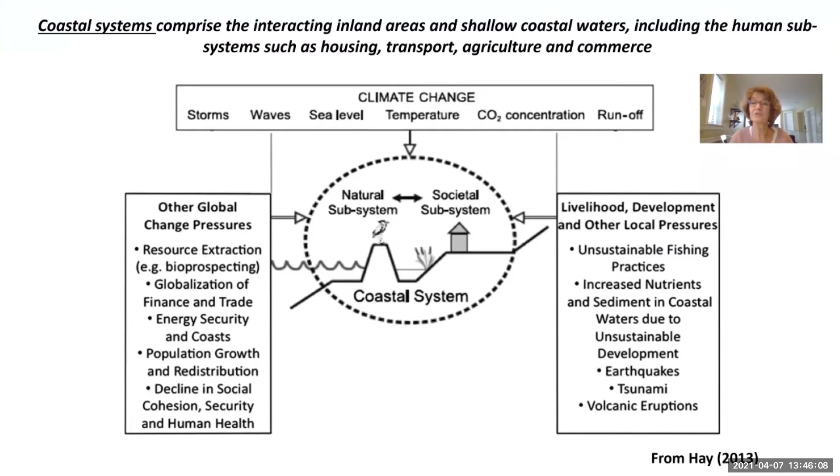These coastal systems are exposed to the impacts of climate change through storms, waves, sea level rise, elevated temperatures, elevated carbon dioxide concentration, and runoff of pollution to nearshore waters. So coastal systems are exposed to global pressures, climate pressures, and local livelihood and development pressures.

All small islands are interested in risk. All small island developing states in the Caribbean depend upon direct foreign investment, and thus they want their tourism development to have a manageable risk.

Risk is the intersection of natural hazards, exposure, and coastal vulnerability. Vulnerability is going to be what we're talking about today.

So what is coastal vulnerability? It's made up of two general categories of impacts: climate change impacts and anthropogenic impacts. We are going to look at the combination of these two on the vulnerability of the shoreline.

After hurricanes and extreme events, the damage to shorelines can be costly and irreversible, primarily with erosion, loss of shorelines, more land-based source of pollution, and destruction to natural coastal ecosystems.

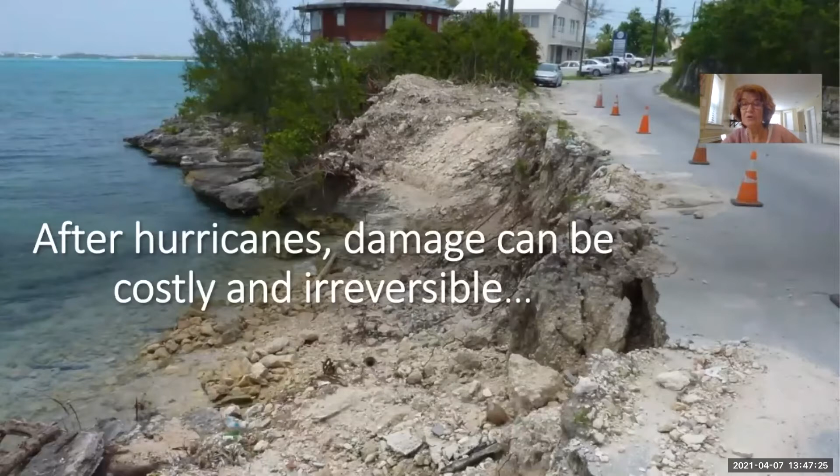Integrated coastal management, in theory, looks at managing development alongside managing coastal and marine resources. In integrated coastal zone development, you want to manage the different stakeholder groups and local communities intersecting with tourism coastal development and protection of natural resources that provide services and livelihoods for coastal communities.

The reality for coastal management in practice, particularly in the Bahamian archipelago, is the development of large coastal resorts. These coastal resorts fit a tourism model with lots of amenities, based on a business model with a certain large number of individuals that can come and go.

So how do we manage these development pressures against the climate change and global pressures on island ecosystems? We are going to look at a coastal vulnerability index that's been used in a number of different settings.

This coastal vulnerability index has four components: a component of coastal protection, coastal setbacks, the resilience of natural systems, plus the capacity of communities to respond and manage risks.

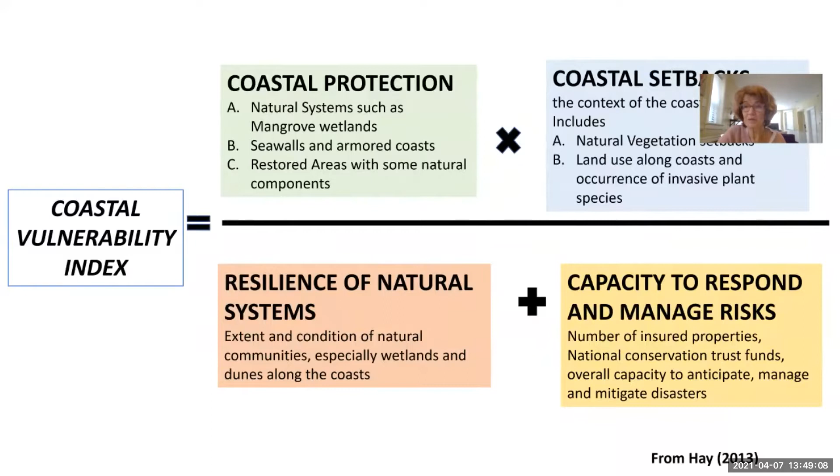We are going to modify this coastal vulnerability index and look at its application to small islands using solely ecological data, which is easy to collect on island-wide scales and can be used for island-wide vulnerability mapping and disaster response planning.

So we are going to look at the human-altered coastal areas, the lack of coastal setbacks in areas, the resilience of natural systems that occur in the area, plus a community's response to manage and respond to these risks.

In this example, our capacity to respond and manage risk is assumed to be the same across the island, and this will be a fixed variable in our equation.

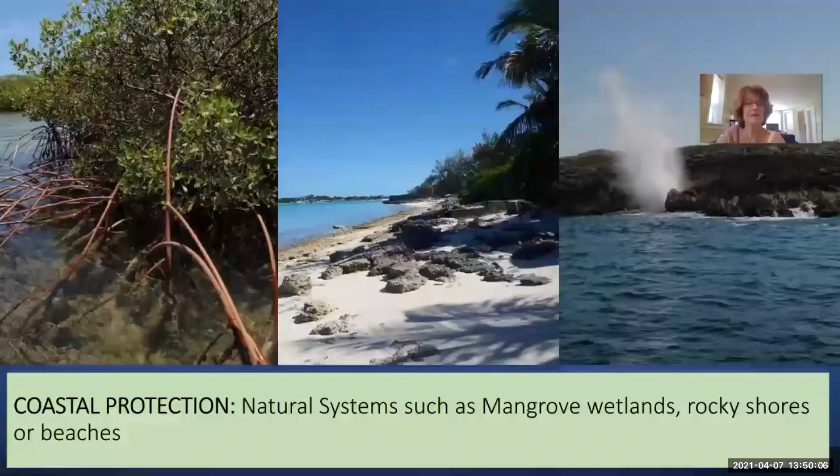When we talk about coastal protection, we're going to talk about the natural systems that occur across the insular Caribbean, such as mangrove wetlands, rocky shores, or beaches.

We're going to look at an island in the central Bahamas where we have developed an extensive spatial database on the distribution of natural communities and the vulnerability of this island to extreme events, such as hurricanes and flooding.

When we look at coastal setbacks, there have been throughout the Caribbean standard horizontal setbacks recommended by both the Caribbean Development Bank and the United Nations Environmental Program on how to protect property.

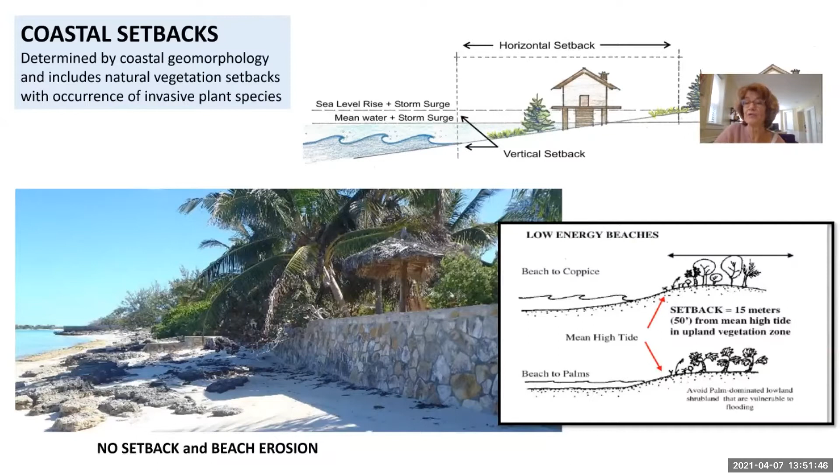Coastal setbacks are the horizontal distance back from the high tide line where you would place your building or property, allowing a natural vegetation buffer to protect that property. This horizontal setback varies in distance depending upon whether you have a high energy reef, a beach system, a low energy beach, a rocky shore, or mangroves.

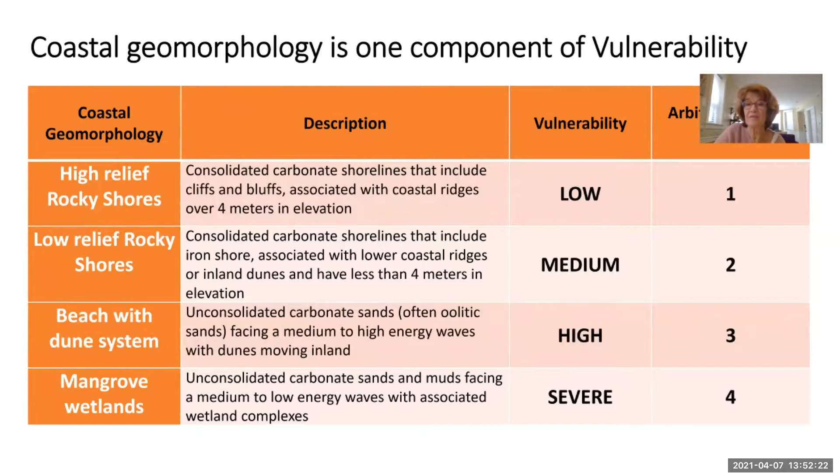Coastal geomorphology is one component of vulnerability. High cliffs and rocky shores are the least vulnerable. Low relief rocky shores are more vulnerable. Beaches with dunes are highly vulnerable, often because the dunes are removed in development and sand is removed in sand mining. And mangrove wetlands, because of their low-lying extent, are often severely vulnerable to flooding and climate change.

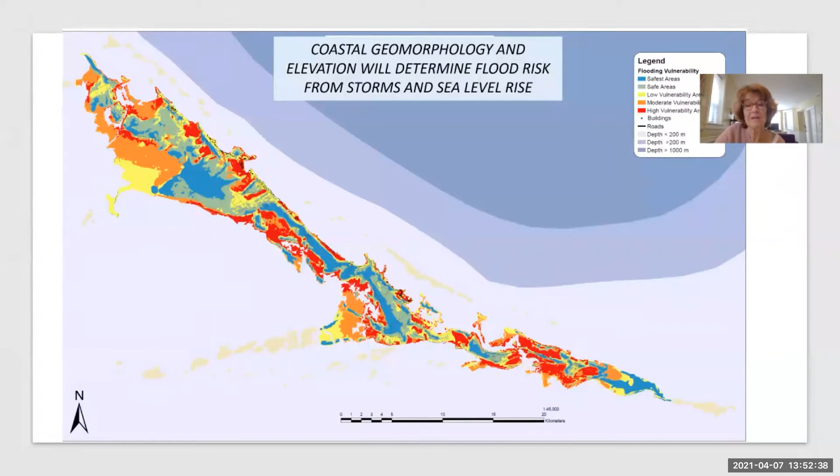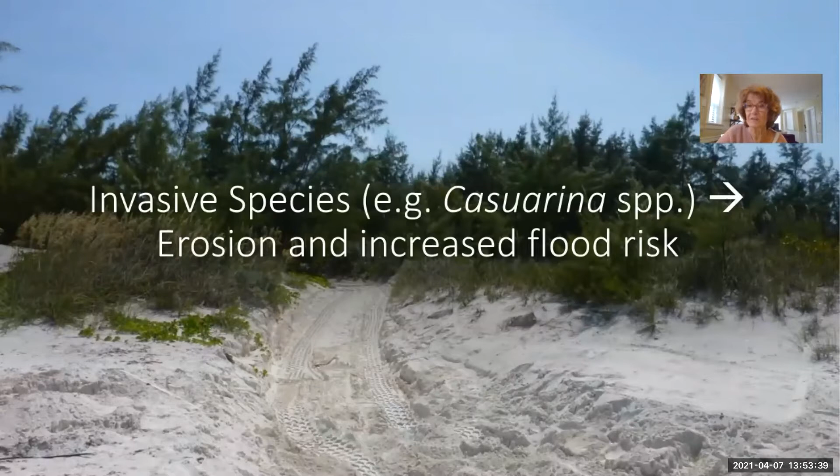Once we have the geomorphology, how do we really assess these coastal setbacks? We need to look at the extent of natural vegetation. When vegetation is removed, you have the increased risk of erosion and flooding in coastal areas, and particularly flooding to property. And when sand mining occurs and you have introduction of invasive species such as casuarina, the Australian pine, this also increases erosion and flood risk.

So resilience of natural system is the extent and condition of natural communities, especially wetlands and dunes along the coasts. These natural vegetation buffers are made up of drought-resistant, salt-resistant, slow-growing, hardy plants. The native plants have evolved over time to stabilize the shoreline, process pollutants, minimize erosion. So we see on the left, native vegetation on a rocky shore, the right, native vegetation along a sandy beach.

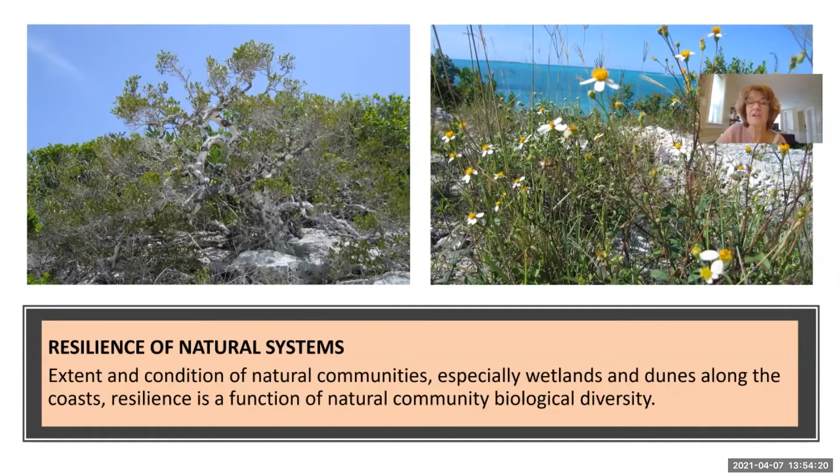The offshore communities can also protect shorelines from wave energy. So the diversity of invertebrates offshore can reflect the robustness of reef and hard bottom communities that can protect shorelines and add to this protection from the coastal geomorphology.

The capacity to respond to management risks is a function of the number of insured properties, national conservation trust funds, overall capacity to anticipate, manage, and mitigate disasters. This would be the subject of a whole other study. We're assuming that this would be more or less even across the entire island of Great Exuma, but having priority areas and more highly vulnerable areas highlighted would help focus this capacity to respond and manage risks across islands and archipelagos.

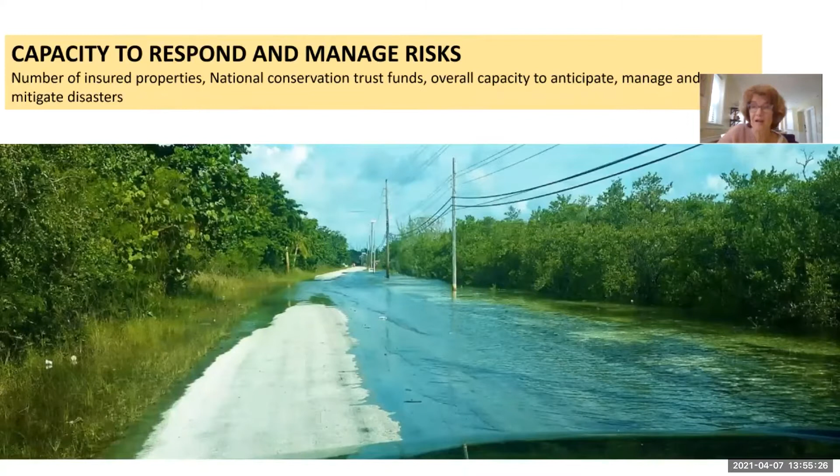So let's look at our coastal vulnerability index as we incorporated ecological components. We're going to look at human altered shoreline area times the lack of coastal setbacks over the resilience of natural systems plus this capacity to respond. This is modified from Hay 2013.

If we take the example of Georgetown, the largest settlement on the island, this is a highly developed, low relief rocky shore. So if we look at Georgetown coastal vulnerability, this is high, 1.325 for the island. Part of that is because the human altered shore, about 88% of the area has been altered. There's a large number of buildings, 127 buildings with moderate invasive species. And even though the coastal geomorphology is less risky, there is no coastal setback. The natural systems are fairly resilient, but this still gives us a vulnerable area.

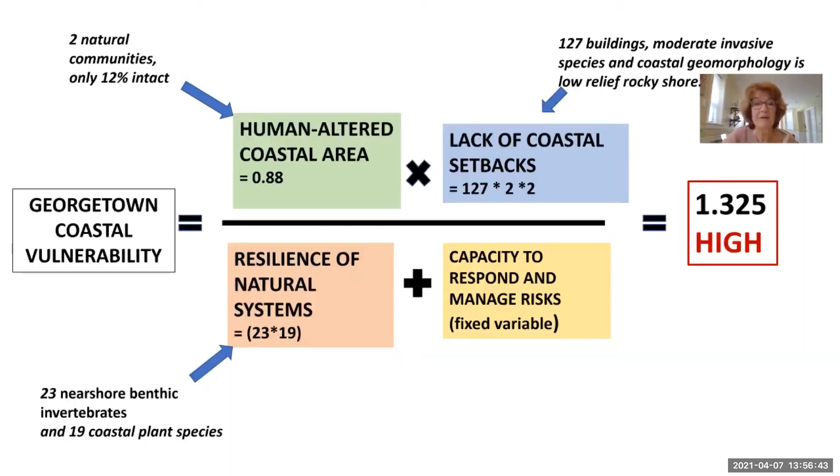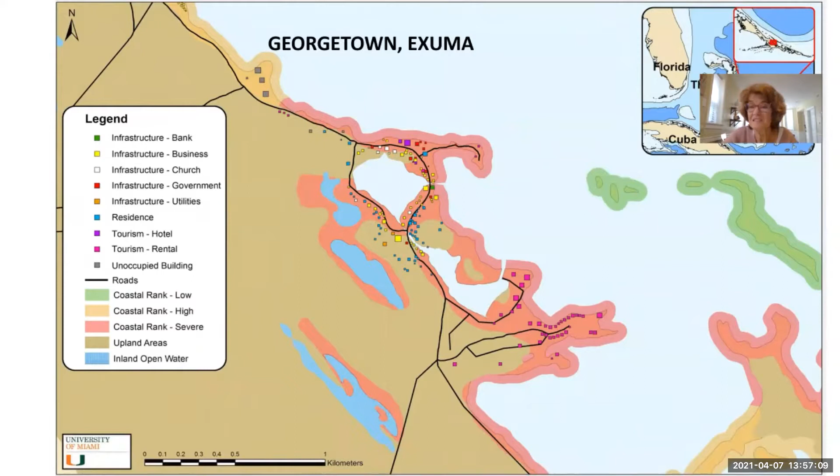If we look at our past analysis in coastal ranking and vulnerability to flooding, we can see that the Georgetown area in the center with a number of different buildings that include government buildings, infrastructure, tourism, and private residences is very vulnerable because of the density of development very, very close to the shoreline.

So coastal vulnerability is high if you have high alteration of natural communities, if you have natural communities that are highly fragmented, and if you have the lack of coastal setbacks and the resilience of natural systems is low.

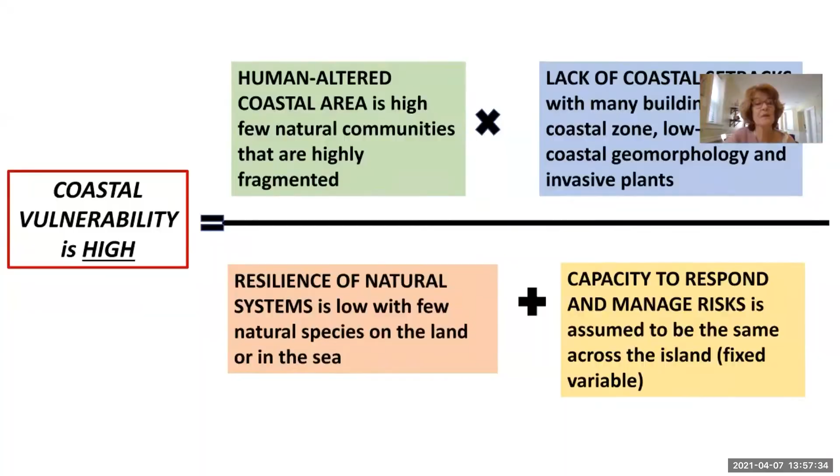We can look at the highest vulnerability on the island, which is actually a high energy beach with a lot of development right up to the water line. So the building envelope goes to the high tide line. There's mostly a loss of native species with dominant invasive species such as Australian pine. Part of this is historically a built-in risk because the main highway on the island is built along the original dune line. So moving of the roads and infrastructure could reduce vulnerability to some of these coastal properties.

Coastal vulnerability is low when you have high coastal protection with intact systems, you have coastal setbacks, you limit the number of buildings right along the coastal zone, and you depend upon the resilience of natural systems.

So in here in Bahama Sound, you have a very low coastal vulnerability index. This mainly is a function of much of the vegetation is left intact. There is one building, it's a low relief rocky shore, and you have a lot of vegetation, even though you have the same liability of the main highway very close to the shoreline.

So coastal vulnerability mapping can be a key component for coastal zone management and disaster response planning. This is the first step in helping people understand how they can use the natural environment to decrease their vulnerability to the future impacts of climate change.

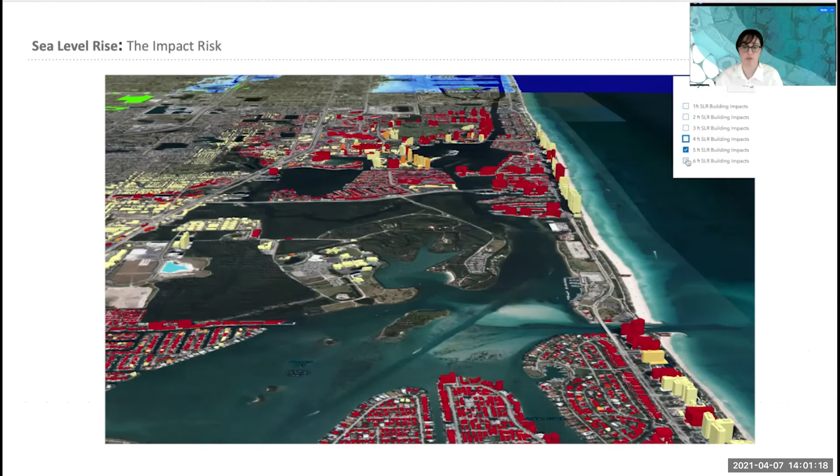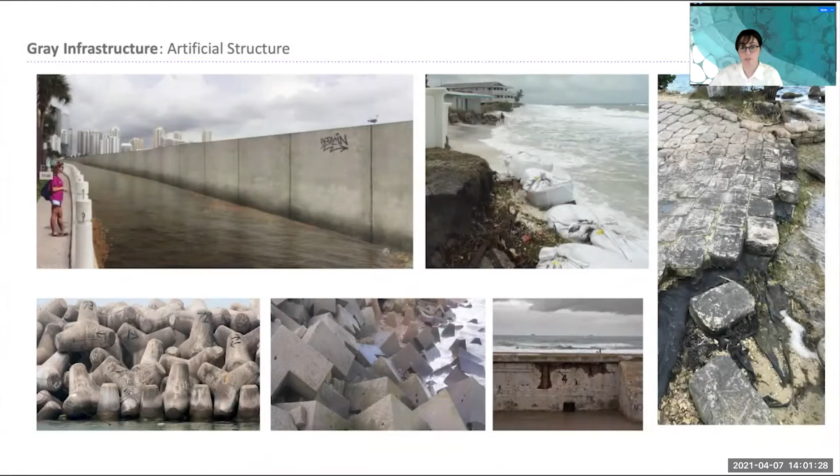Our coastal lines are in significant distress due to climate change. To protect the coastal area from climate change impact, a common and widely used technique is creating hard infrastructure. This often entails constructing a concrete barrier along the shoreline to provide a shield from wave attack, which can cause massive harm to the ecosystem by making coastal areas more vulnerable to storms and destroying the coastal habitat.

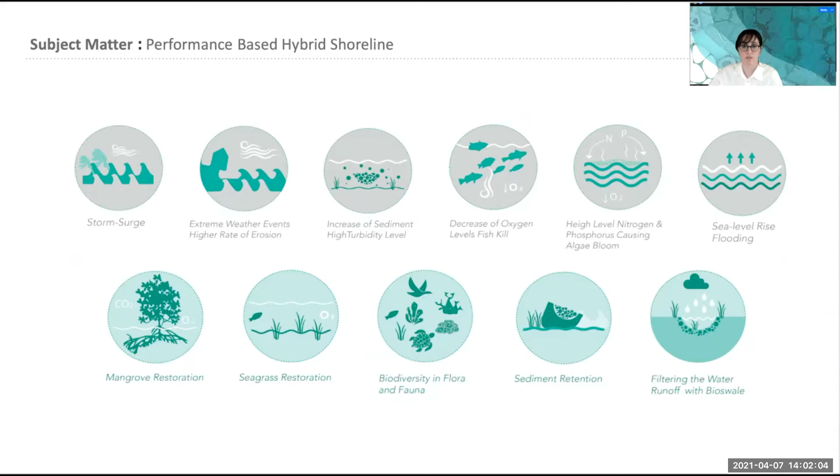The performance-based hybrid infrastructure project is a mitigation strategy for resisting sea level rise, deforestation of mangrove trees, restoring salt marsh seagrass, reducing high sedimentation rate and water turbidity level, and decelerating depopulation of marine biodiversity. This project is also designed to offer people a unique experience to come and engage and enjoy their local environments.

The project implements a sustainable strategy for creating a protective infrastructure framework that combines resilient shoreline with natural features. The aim is to create a performance-oriented landscape responsive to climatic conditions like water and wind forces generated over time.

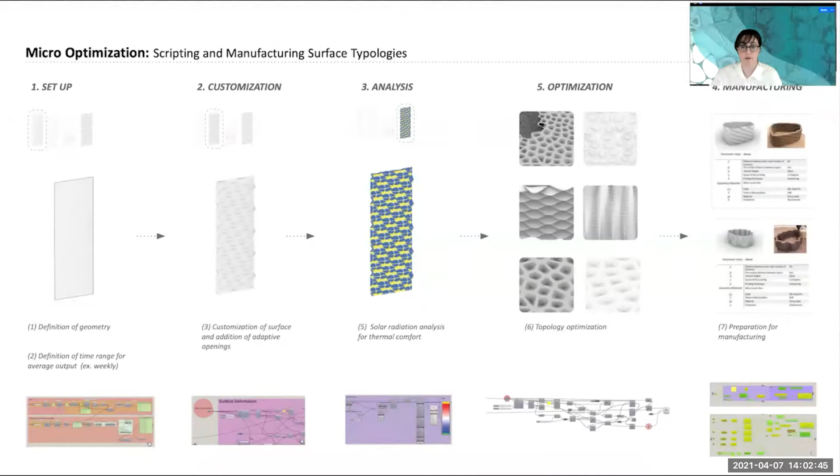Performance-oriented architecture attempts to fully overcome the distinction between forms and function in design, as said by Hensel.

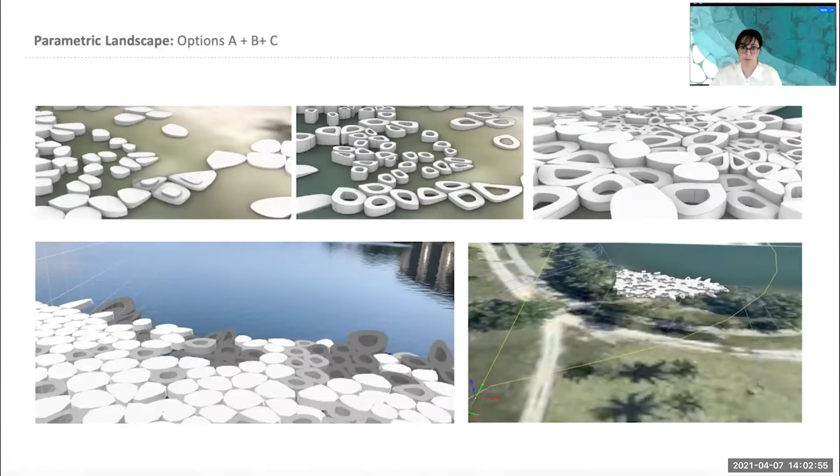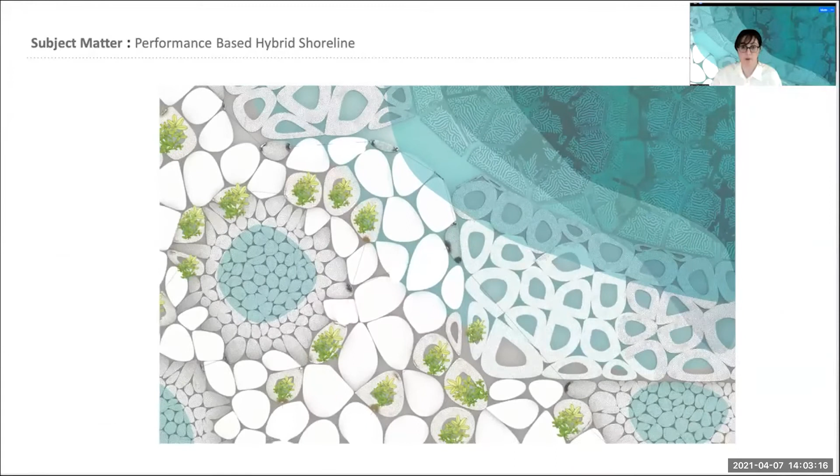The described project consists of a smaller module called biotile, which can be arranged and generated based on microclimatic information and data. In addition to protecting coastal erosion, the biotile will collect sediment accumulation, decrease the surface temperature, and filter the stormwater runoff. The project used environmental and climatic data for the development of the data-driven landscape infrastructure.

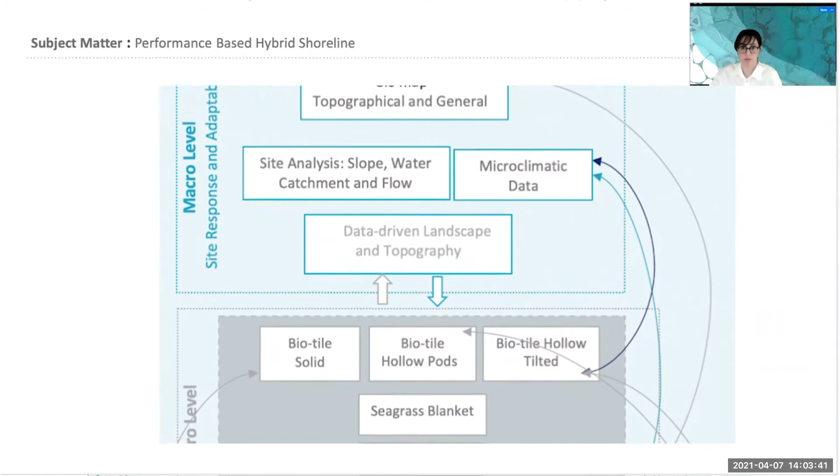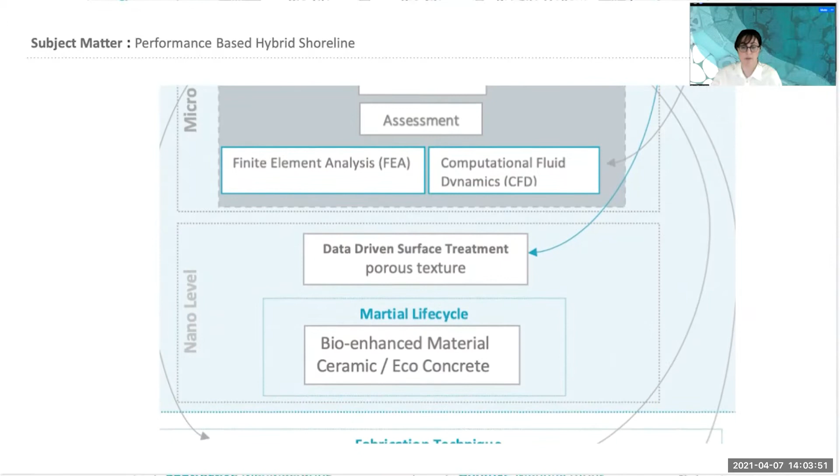The design methodology used to develop performance-based hybrid infrastructure is in 3 stages of simulation. First, the macro level that enables the manipulation of the overall topography along the shore. Second, it's the micro level that includes the creation and configuration of biotiles. And third, the nano level involving material property of surface manipulation in all 4 forms of biotiles.

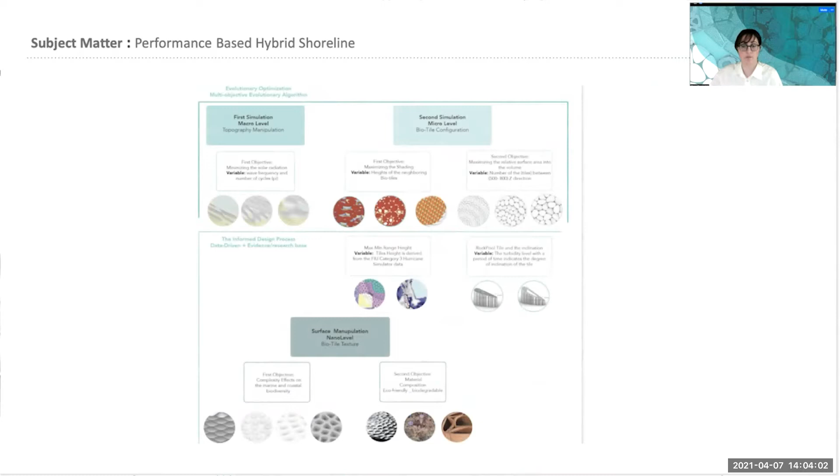The evaluation process is based on the evolutionary and multi-objective optimization process, utilizing an evolutionary and analytical engine, a Rhino plugin called Wallacei. The workflow begins by formulating the design problem, followed by the evolutionary algorithm. Once results are achieved and evaluated, the fittest design is chosen.

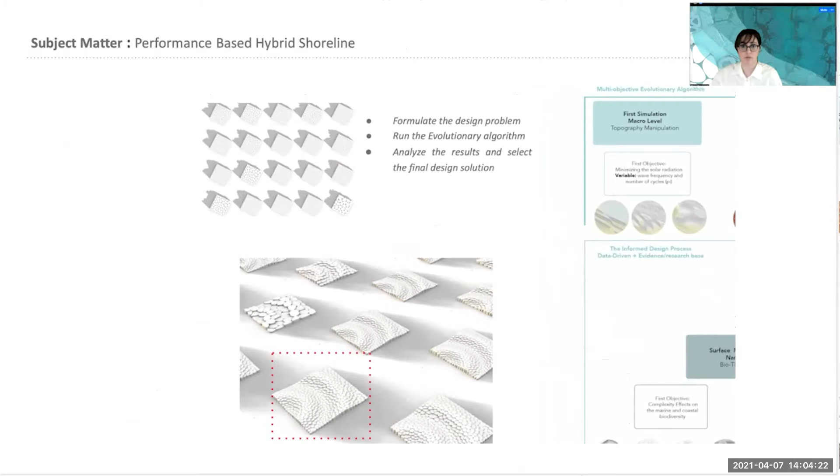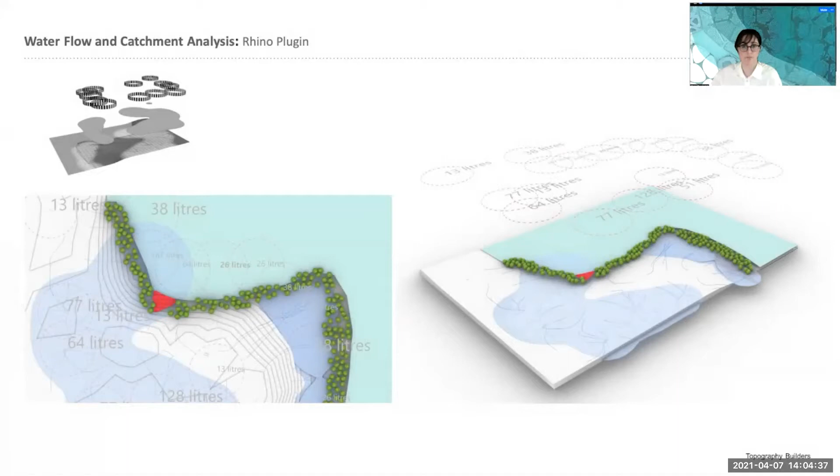The first simulation at the macro level controls the landscape to create artificial topography. The initial step is to analyze the current site slope and study the water flow to identify the catchment areas. The topographical data from LiDAR point cloud is translated to a 3D modeling format and analyzed further.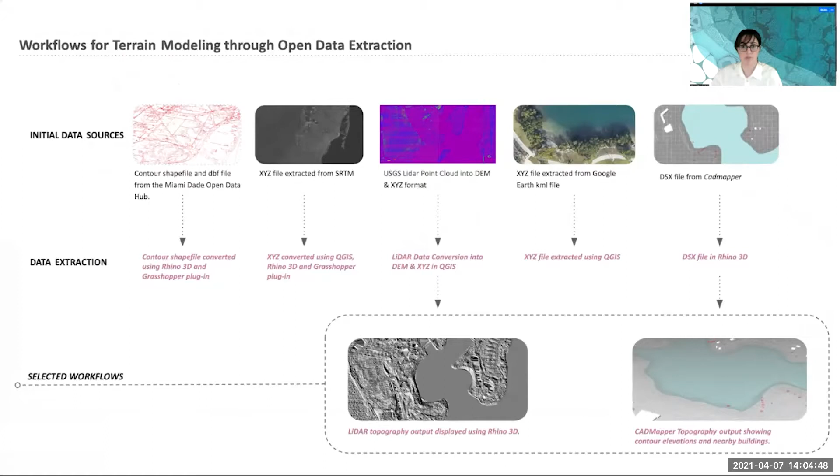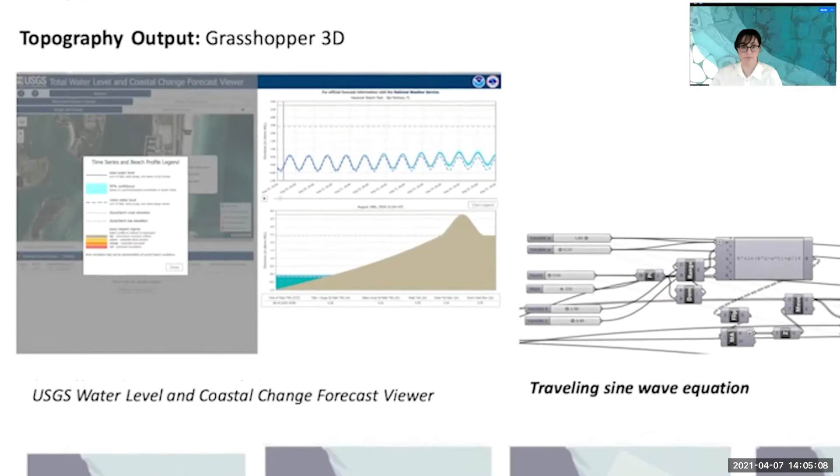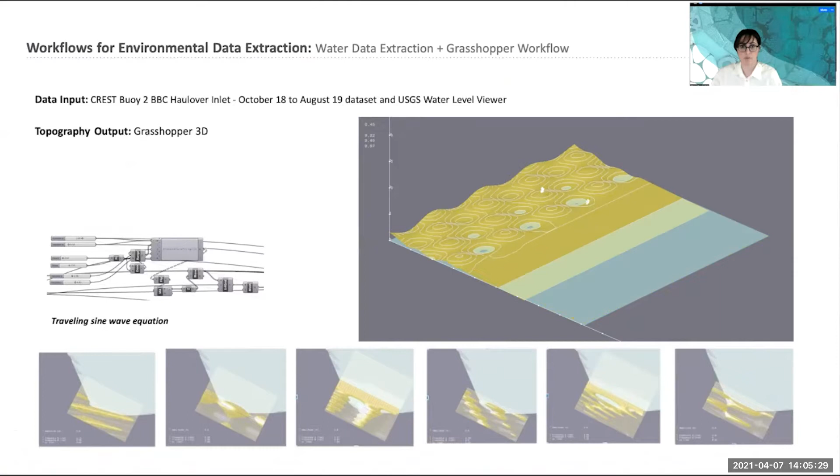The design is based on the water current and wave motion that combines both horizontal and vertical water movement. Water currents are constant, predictable, directional movement of ocean water powered by gravity, wind, and water density. The algorithm used here is based on a sine wave equation consisting of amplitude, frequency, and cycle of pi. The range of wave frequency within data is collected from USGS water level and coastal change forecast of the project location. Various artificially manipulated topographies are produced from this generative workflow, which are evaluated and then selected.

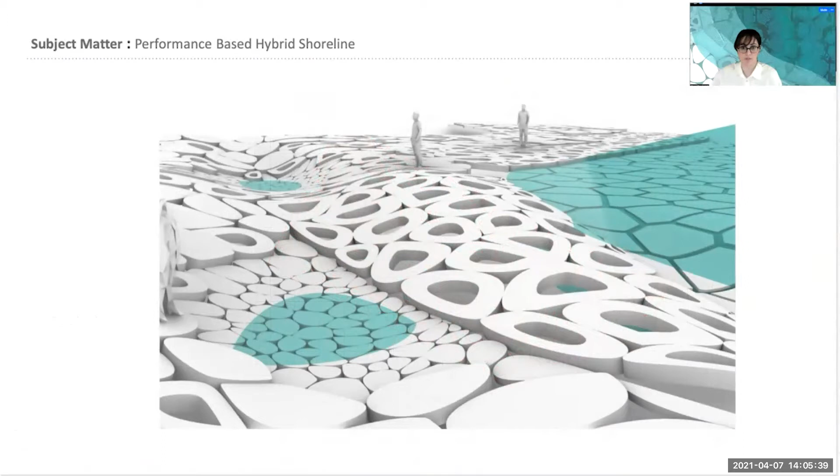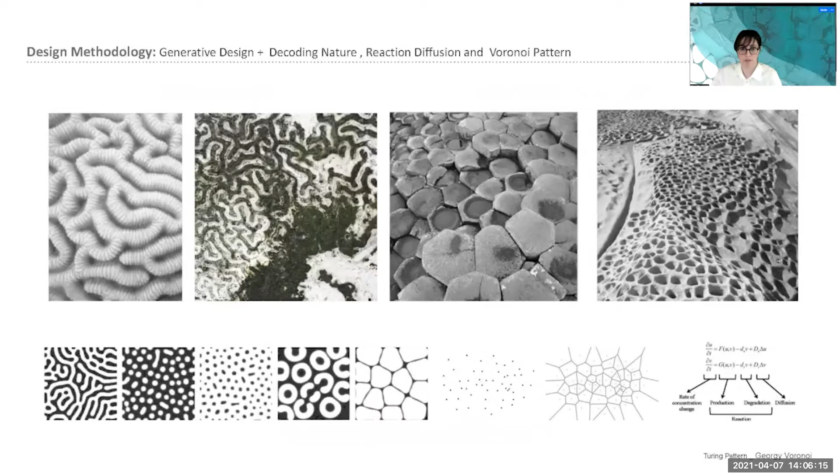The second simulation at the macro level is used to generate and arrange biotile based on multi-objective parameters such as microclimatic information and data. The morphological structure that is generated through the algorithm of biotile is formulated on a biomimicry principle. The pattern generation is through an algorithmic process using underlying code inspired by the natural phenomena of rock formation along the coastline, similar to the Giant's Causeway on the northeast coast of Northern Ireland.

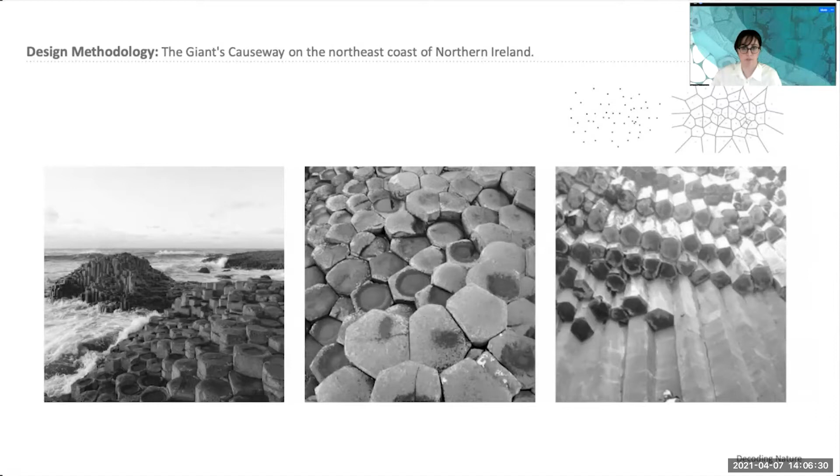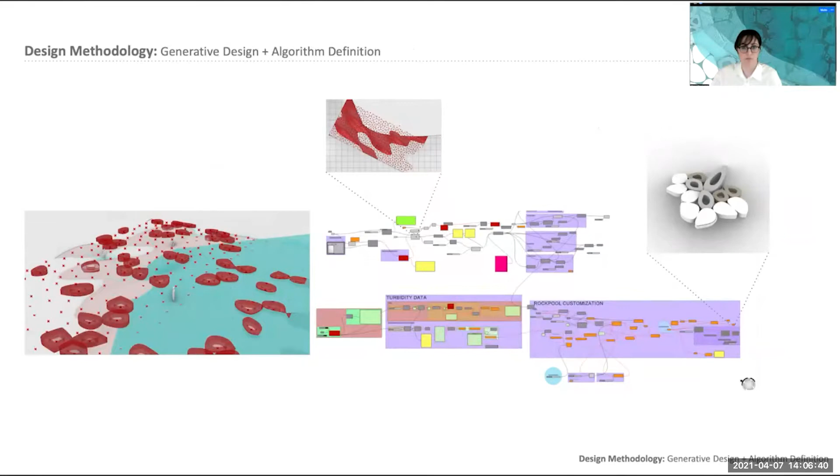This natural phenomenon of basalt formation generates a polygon pattern called the Voronoi configuration during an intensive volcanic eruption. The Voronoi algorithm reflects efficiency in nature, since the arrangement of the space is dependent on the proximity of the neighboring cell.

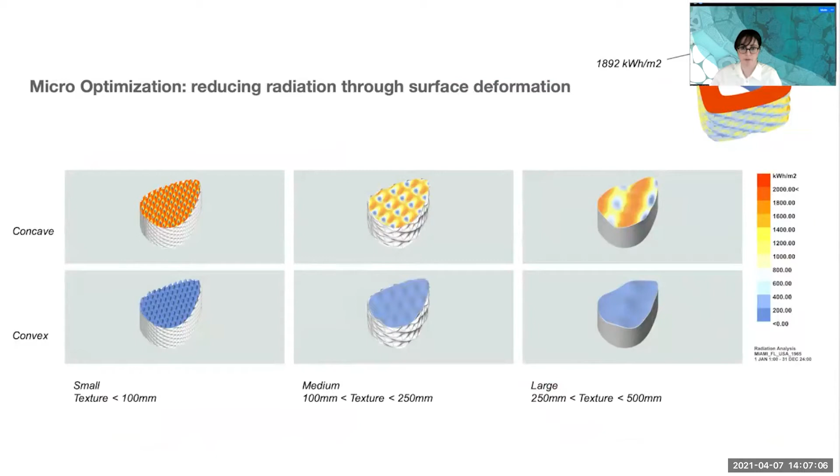This provides an opportunity to design a surface area that is self-organized to the site and adaptive to the environment parameters. Height differentiation in biotiles is coded based on the solar radiation data from the site to optimize shading on the adjacent tiles. This process is also simulated through an evolutionary and optimization engine that produces multi-generation configurations.

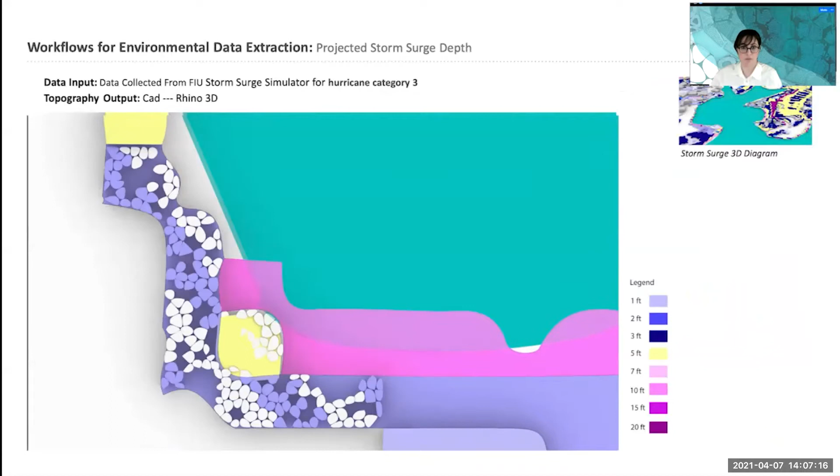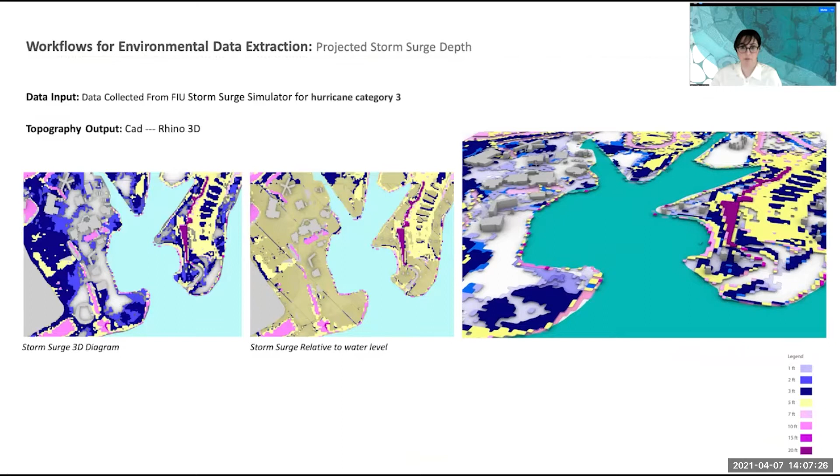The biotile ranges indicated inside each color-coded zone are estimated from the storm surge depth data obtained from the storm surge simulator for a Category 3 hurricane. The zoning criteria also designate an area along the water for the third typology called the rock pool, which collects sediment during the storm surge and other extreme events.

This optimization is based on scientific case studies for sediment accumulation strategies. The tile's height and degree of inclination are informed and generated by the algorithmic code, fed by the local pool water data, which indicates the turbidity level.

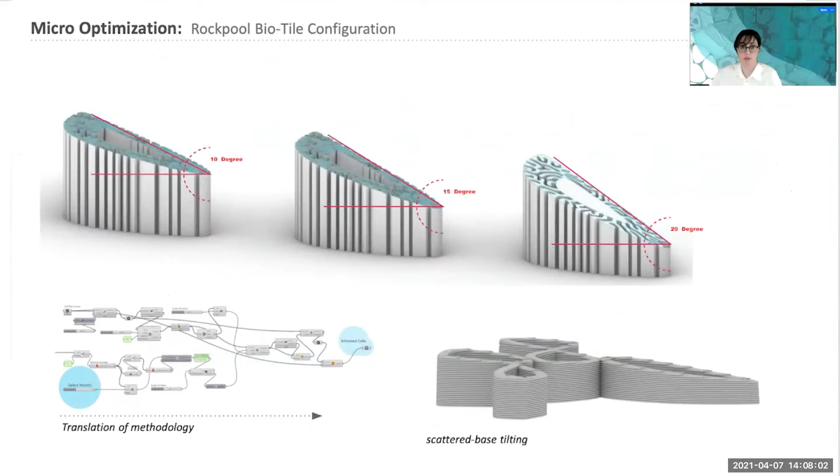These processes result in four tile typologies. First, a solid typology that withstands water and wind, slowing down erosion while filtering and managing stormwater runoff. Second, a donut-shaped typology with a pot in the center of the tile to house seeds for mangrove restoration.

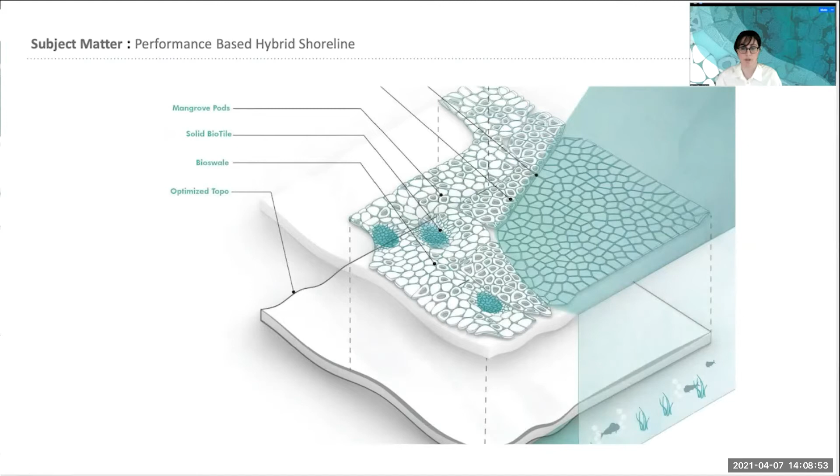Third, an artificial rock pool typology positioned to collect sediment runoff. And lastly, a porous typology that retains and restores seagrasses. At the same time, by using eco-friendly materials and mimicking natural texture deformation, all of these tiles promote biodiversity.

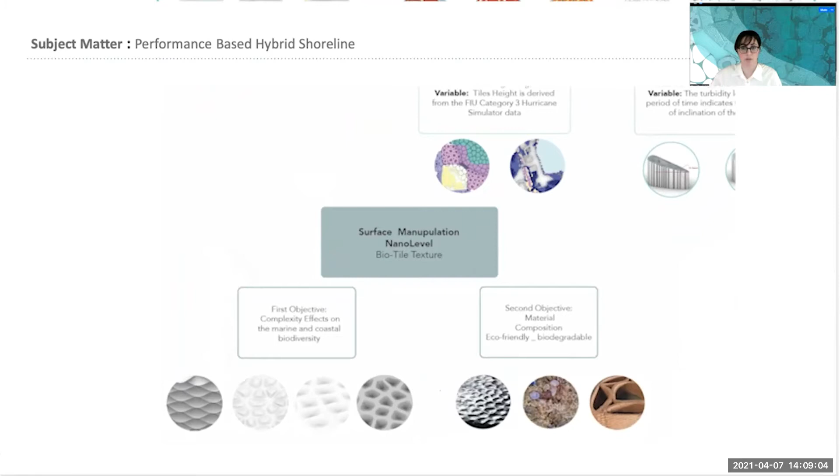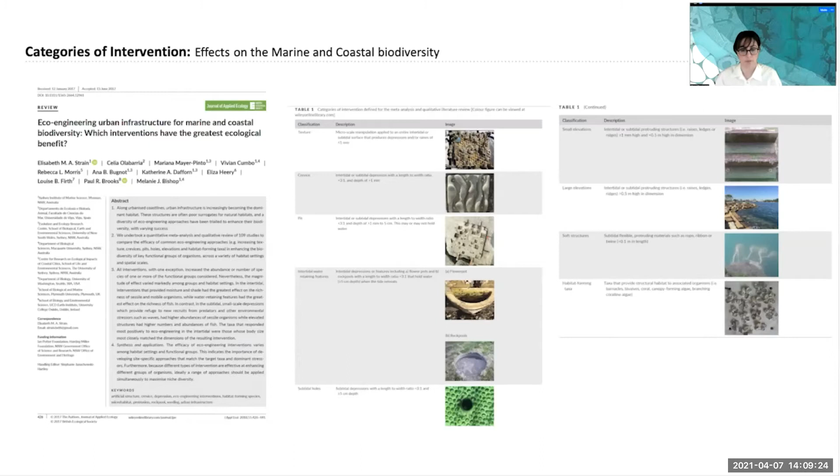The third simulation is at the nano level, which focuses on the biotile materiality and surface texture. The surface deformations are developed based on a precedent study called Eco-Engineering Urban Infrastructure for Marine and Coastal Biodiversity, which compares the effectiveness of eco-engineering interventions to determine which have the greatest ecological benefit. Various forms of intervention are introduced and tested to reflect various species' efficiency.

Different surface manipulation techniques have been used in the tile to increase the abundance of intertidal flora and fauna by increasing texture, crevices, and holes.

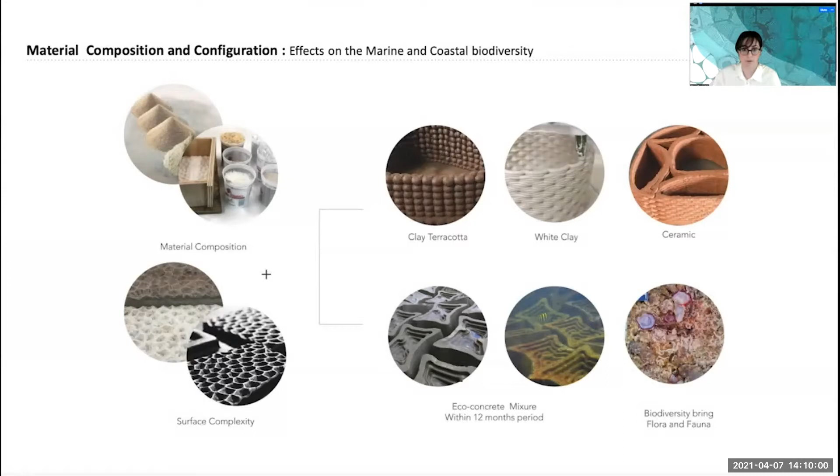We have also prioritized the selection of biotile materials to minimize marine life's impact and improve its robustness and sustainability. During the testing process, several combinations of materials were used to explore and examine their capacity and limitations.

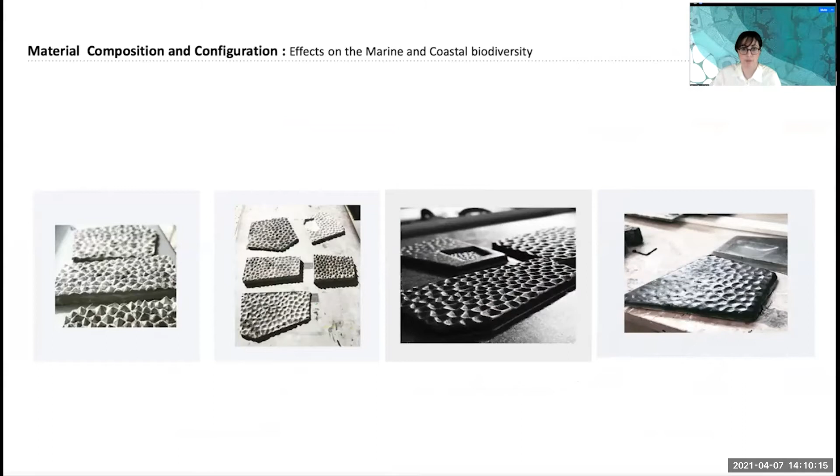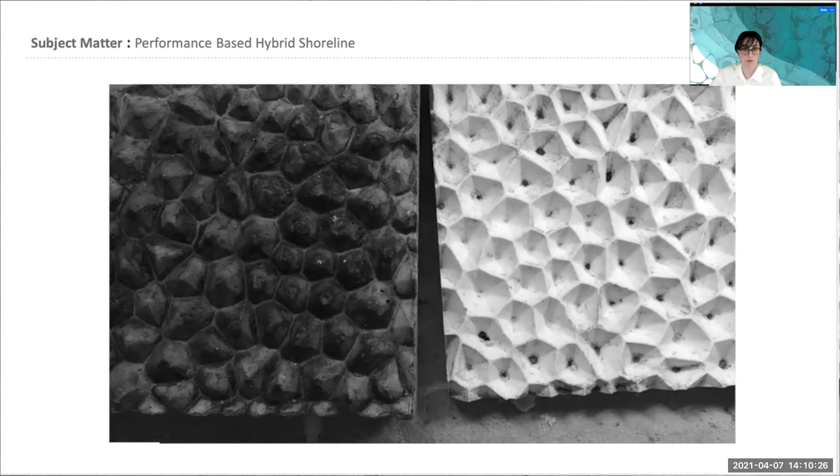In particular, the tests help us better understand the eco-friendly concrete property as a potential material, with a production process that produces fewer greenhouse gas emissions than standard cement.

The structural performance of the tiles was assessed before their placement near water. The analysis was done with computational fluid dynamics analysis to test the proposed intervention under wave and wind impact forces. The evaluation results of the various CFD simulations led to decisions on finishing and fabrication methods.

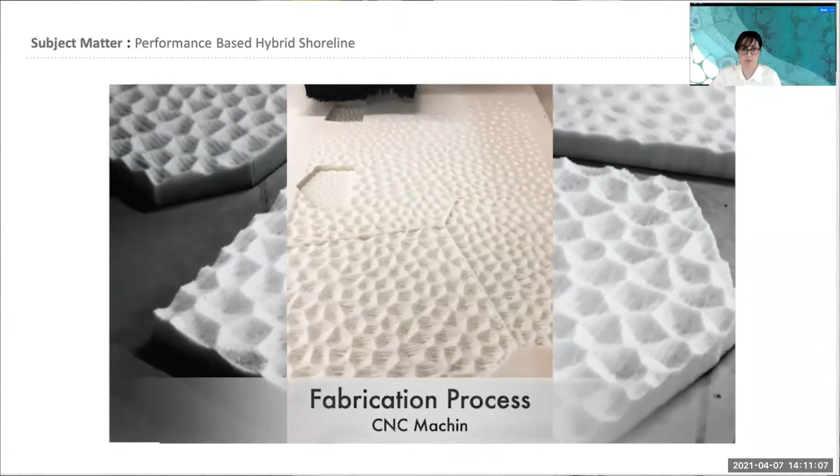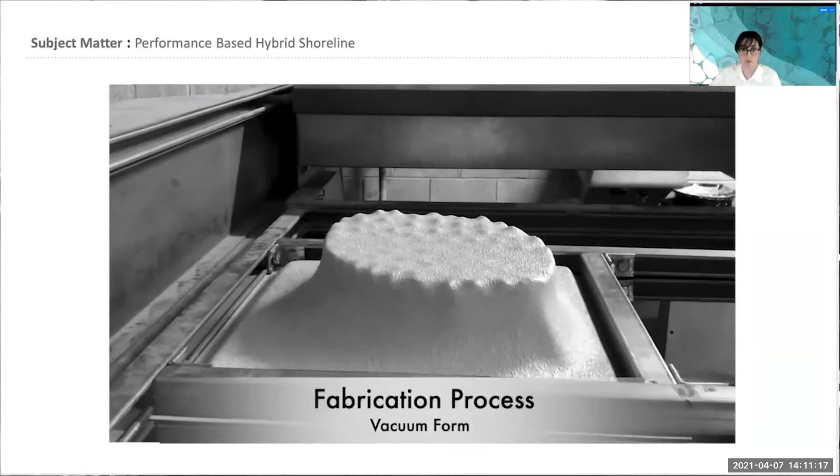During the project development, several prototypes were produced for testing. The fabrication process is part of the design requirements from the outset in this workflow. The prototypes resulted in a composition of four main topologies, produced with either additive or subtractive manufacturing methods.

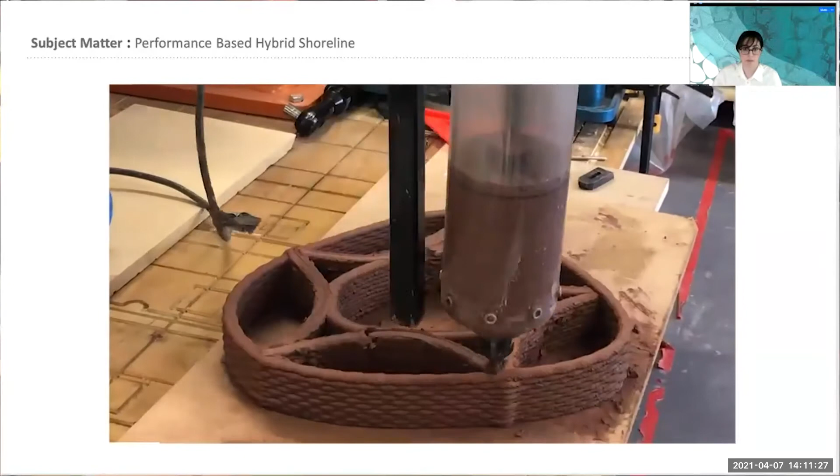To test the biotile performance, we have placed and are monitoring the prototypes along the shoreline to evaluate their impacts on the erosion and marine fauna.

The donut-shaped tile configuration will be evaluated based on the planted mangrove seeds' health and alteration in shoreline biodiversity. The rock pool configuration will be evaluated by measuring the amount of sediment accumulation in the biotile center. The composition will be evaluated for its performance against wind, water forces, and their overall effect on the existing ecosystem.

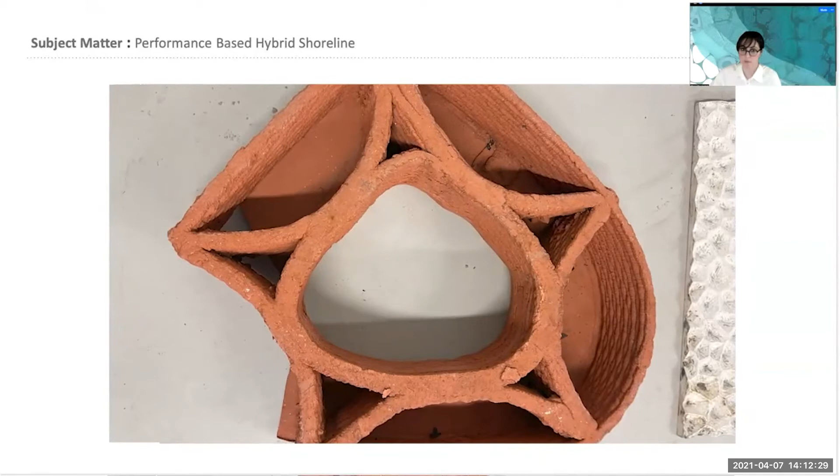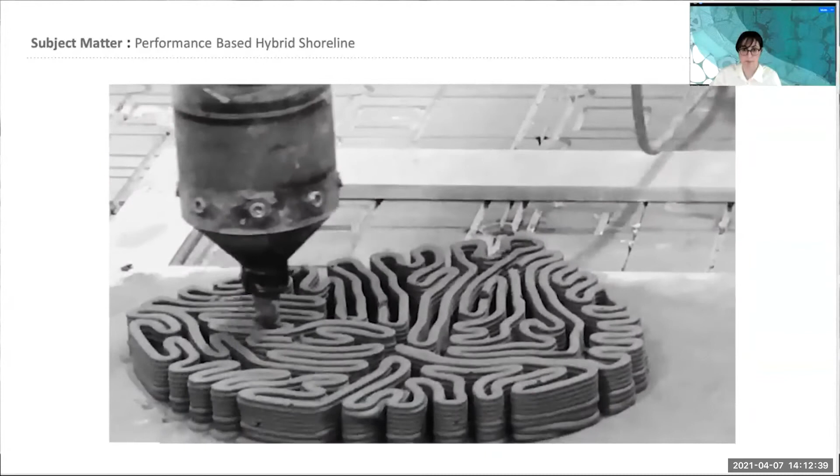Our results will be compared with a set of standard tiles, also placed in close proximity, to provide a comparison base. We realized after the first trial that the internal structure infill supporting the outer wall was not performing as anticipated. As a result, we developed a uniform system in which the structure serves as both a wall and skin simultaneously, using the reaction diffusion algorithm.

This study aims to evaluate the possibility of an algorithmic workflow for resilient design and test a performative infrastructure that can contribute to environmental biodiversity. If these trials are successful, our goal is to expand and apply this methodology to other ecosystems in need of protection and restoration.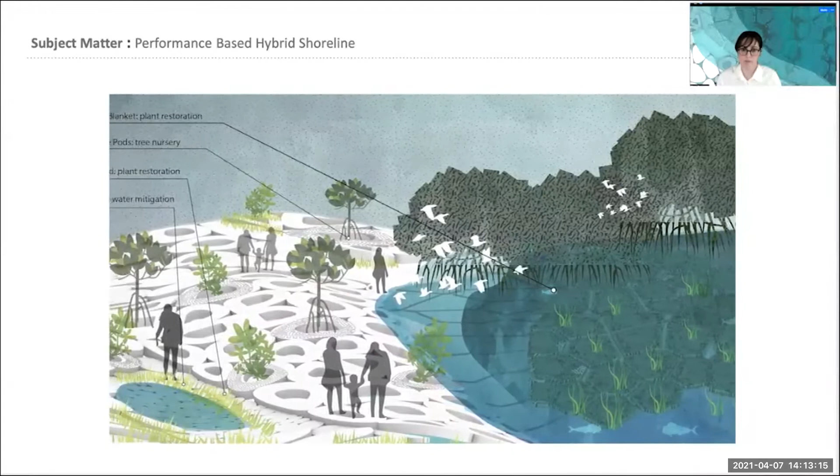This goal can only be achieved if there is a higher level of collaboration between disciplines and practitioners. In addition, we are hoping to help policymakers who manage environmental crises to implement effective policy that promotes environmental research.

Thank you. The project has been a collaboration between the architecture faculty at Florida International University and the Center for Aquatic Chemistry and Environment, CREST, an NSF-supported center at FIU.

So, Sara, thank you very much for that presentation. I had no sense of the sophistication of those biotiles and the amount of modeling that goes into the design of them. So thank you very much for that.

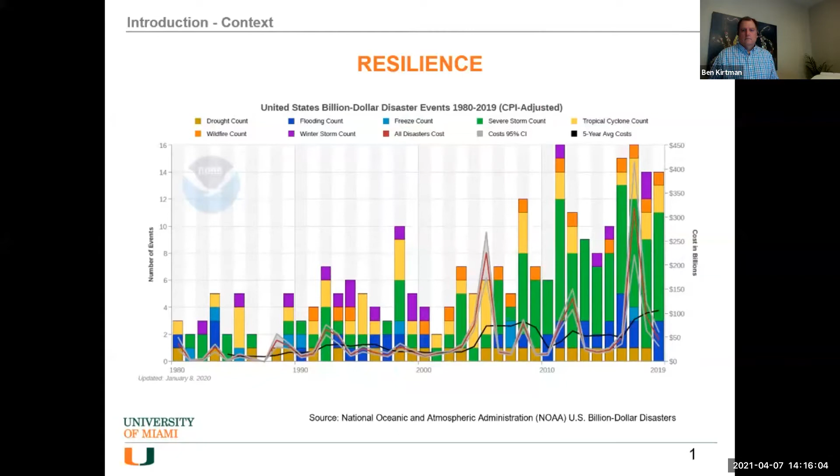Those events include 45 tropical cyclones. In the last 10 years, tropical cyclones and hurricanes are responsible for more than 53% of the total damages and more than 6,500 deaths. The mapping of these disasters clearly identifies southeastern United States, home to over 70 million people and over 20,000 miles of coastline, as one of the most susceptible areas to such disasters.

Nevertheless, the coastal population in the United States as a whole, and in our region, has not ceased to increase, with some of the most valuable properties being in those areas. Therefore, it is critical to make coastal communities more resilient and resistant.

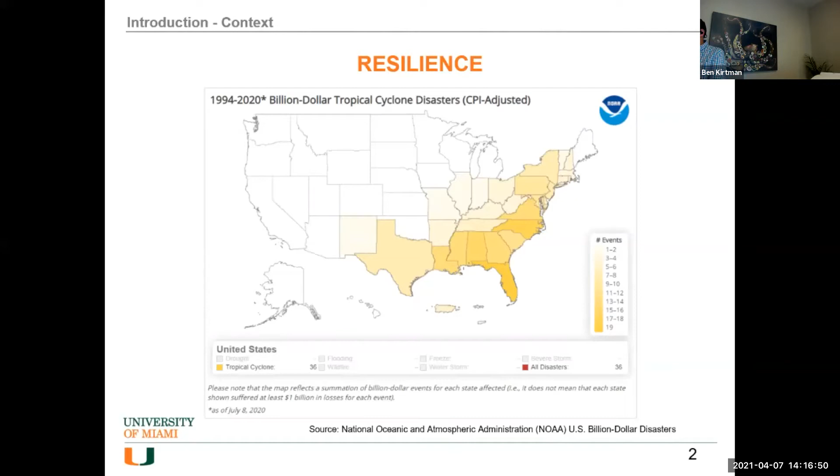When we talk about resilience in the built environment and infrastructure, it is associated with the ability to deliver a certain level of service even after the occurrence of a disaster, and to recover to the desired functionality level within a given time period. A resilient built environment and infrastructure is thus more resistant to weather and climate disasters, limiting their physical impact.

To increase resistance to tropical storms and hurricanes, there is a variety of solutions, from soft green engineering solutions such as living shorelines, to hard gray designs such as seawalls and revetments. Here you have a variety of solutions coming from the Back Bay study.

Now, seawalls and revetments are often considered the most reliable solution, especially for areas where we have small footprint availability, harsh wave conditions, and high surges. However, existing seawall systems do not always perform to the desired level, while they typically support lower biodiversity and fewer organisms than natural shorelines.

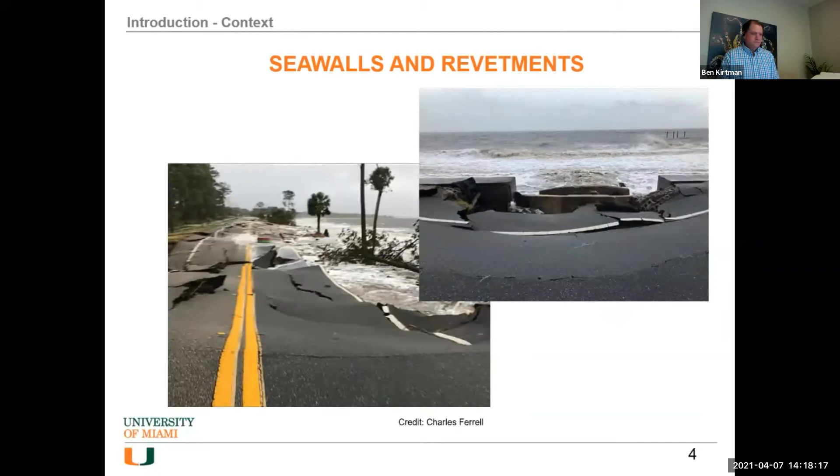So we can seek to find improvements over the traditional systems in performance as well as in biodiversity through green engineering solutions. This is what we're after here: to come up with a solution for a more efficient and eco-friendly shoreline protection system.

In this work, we employed the concept of structural morphogenesis. This framework studies the relationship between a structure, its form, the material, and forces, and morphogenesis here refers to the process that distributes the material optimally within the system.

For the structural morphogenesis of an eco-friendly marine and estuarine protection system, biocompatibility is key, as it has to be considered within all aspects of the structure and be compatible with the organisms of the local ecosystem.

So the product of our research is called SEAHIVE. It is an engineered shoreline protection system composed of concrete perforated hexagonal prisms. It's a modular system, made out of concrete with non-corrosive reinforcements, and its modularity provides a regular hexagonal tessellation that can be used vertically or horizontally.

The perforations on the side face of the elements provide passage for the water to flow under surging or breaking waves, dissipating the wave energy within the elements, while also adding structural complexity to the structure, which improves their potential for biocompatibility.

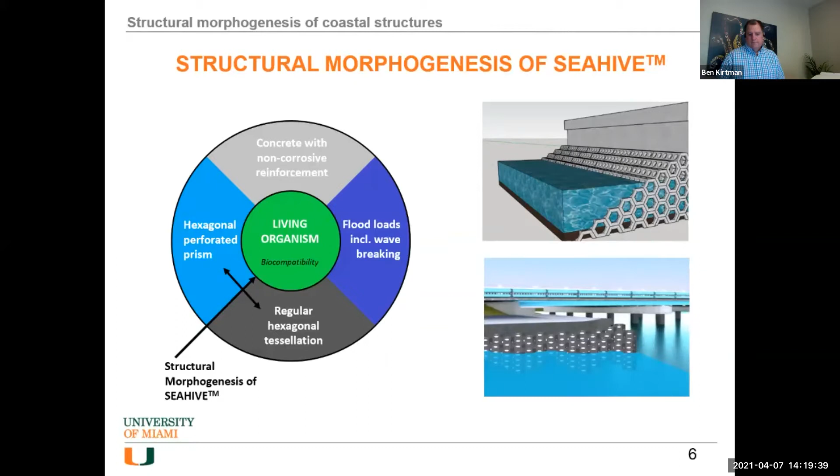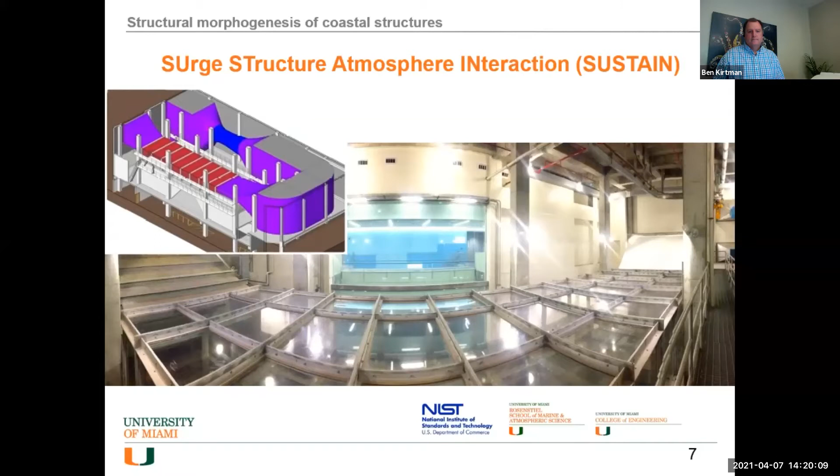In our case, the morphogenesis of the SEAHIVE shoreline protection system has been based on physical testing at the University of Miami Surge Structure Atmosphere Interaction Facility, also known as SUSTAIN. SUSTAIN is a wind wave tank, unique because of its size, but also because we can generate directionally varying waves using a 12-paddle system combined with direct wind forces, simulating hurricane conditions up to Category 5 on the Saffir-Simpson scale.

Here you have a video of SUSTAIN in action. What you see are the mechanically generated waves, and you can also see the wind there. So the wind amplifies their effect, simulating exactly what happens in a real storm. So we have waves mechanically driven, but also amplified by the effect of the wind.

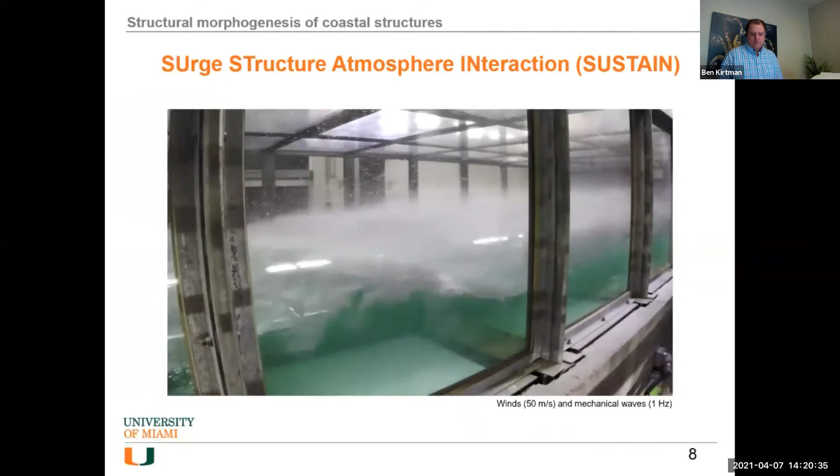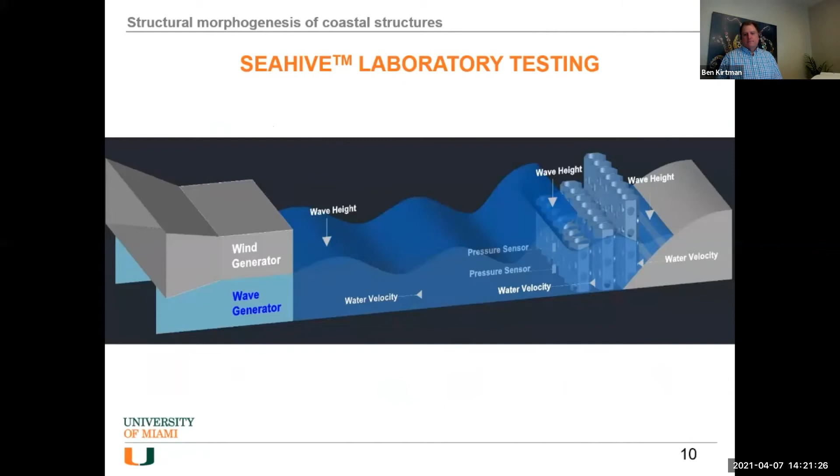In the second phase of the experiment, the testing focused on the system behavior. Here we consider horizontal and vertical system configurations only with hexagonal elements. Similar to the first phase, different perforation configurations were tested. The procedure included a fully solid system, a semi-perforated system, and a fully perforated system.

Here you can see a video of the system testing, with the semi-perforated configuration under testing. The model here is composed of 3 rows of SEAHIVE elements. The first row is submerged and has large perforations. The intermediate row has smaller perforations and is partially underwater, while the last row extends above the water, has no perforation, simulating a bit of a seawall or revetment application.

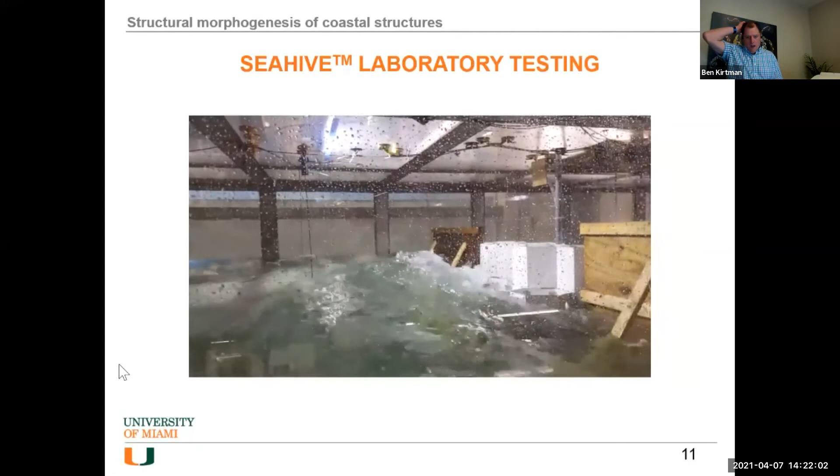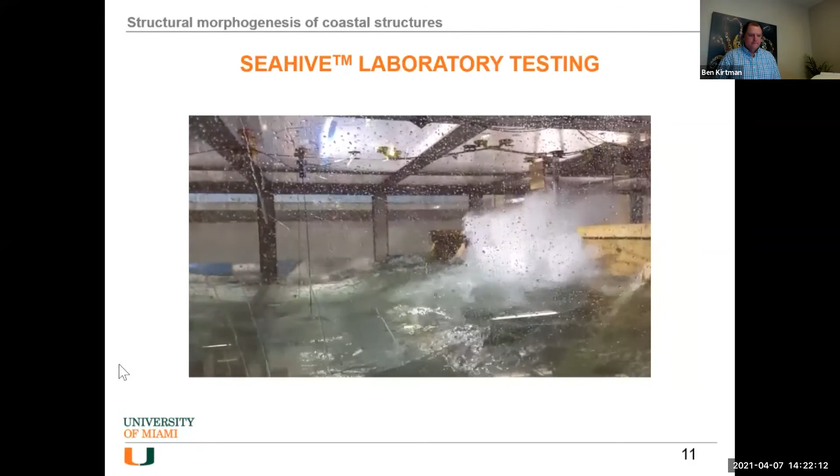Again, through a series of measurements, the loads applied on the system, as well as its performance expressed through wave reflection, were defined. So here, what we do is quantify the system loads and behavior for the design, and link that to auxiliary studies happening around the SEAHIVE concept.

For biocompatibility, field studies are critical because you have to do those studies out on the sea and capture the real recruitment of those materials. But field deployments are also critical for validation purposes as well as for technology transfer.

Our second pilot installation is an artificial coral reef structure. This installation will take place offshore of North Beach Oceanside Park in collaboration with the City of Miami Beach, in the context of a Laboratory for Integrative Knowledge U-Link project, which investigates coral reefs for shoreline protection.

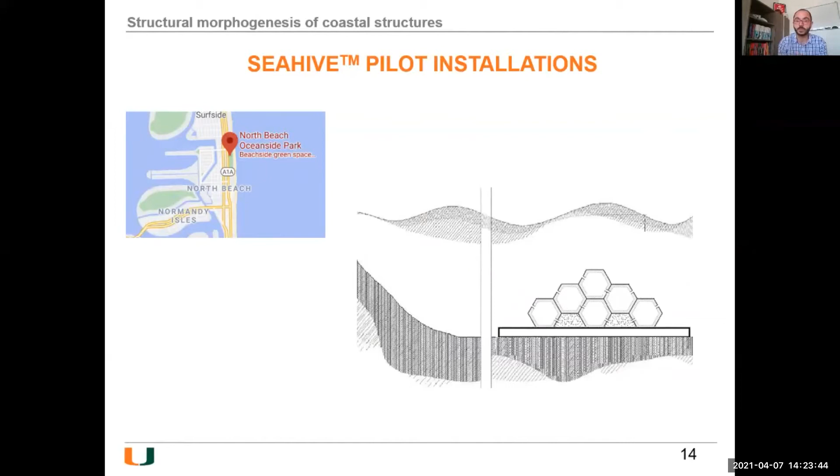Our third installation will take place in front of a newly developed community park in Pompano Beach called Wahoo Bay, in collaboration with a nonprofit organization, the City, and Broward County. This installation is a seawall mangrove planter combination.

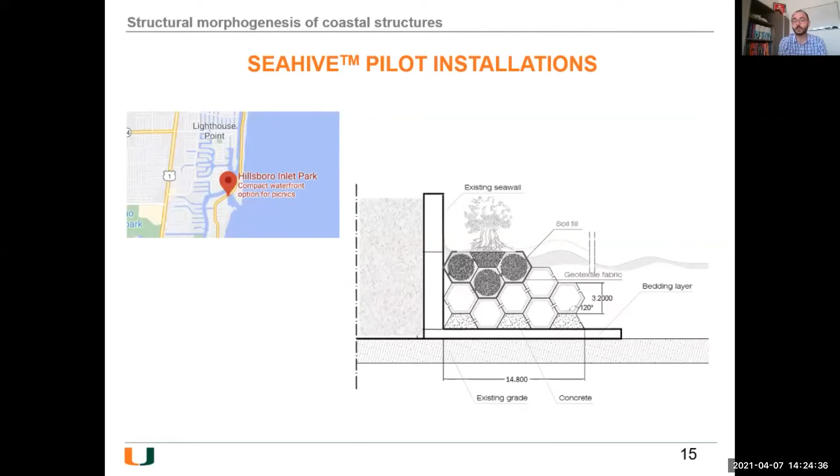All 3 installations will be monitored and analyzed to assess their as-built performance. The structures are currently under permitting review, and we cannot wait to get the green light, as this will take our research to the next level. Combining the actual laboratory results with data from those structures will really enhance our work and provide us the necessary proof that our system works, so that we can take this product out to the communities for its use.

Thank you for your attention.